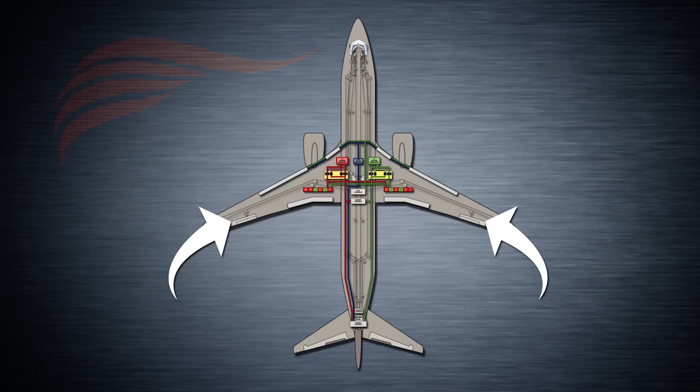The ailerons are coupled so that when one of them moves down, the other moves up. There are 3 ways of achieving roll control on the 737 NG: manually, by moving either control wheel; automatically, by autopilot input to move control wheels with actuators; or through flight spoilers. These will be discussed at a further stage during this lesson.

During manual operation, the flight crew controls the roll attitude with control wheels that are interlinked mechanically in order to provide system redundancy. Just like with the elevators, the ailerons are actuated through pairs of cables that transmit force.

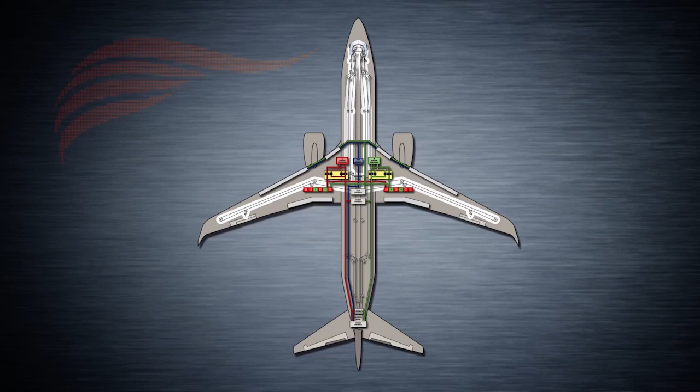Ailerons are also operated via the Aileron Power Control Unit, or PCU, that acts as an interface between the pilot's mechanical inputs and a series of hydraulic actuators that move the ailerons with wing cables. The aileron PCUs ensure that the ailerons are movable under any condition.

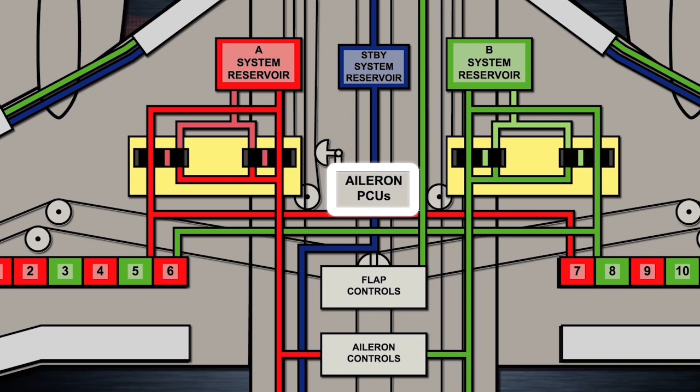Under normal operation, each hydraulic system controls a single aileron. In case of a hydraulic system failure, the working system may control both ailerons. In case of a total hydraulic failure, ailerons are still controllable mechanically. This condition is known as manual reversion.

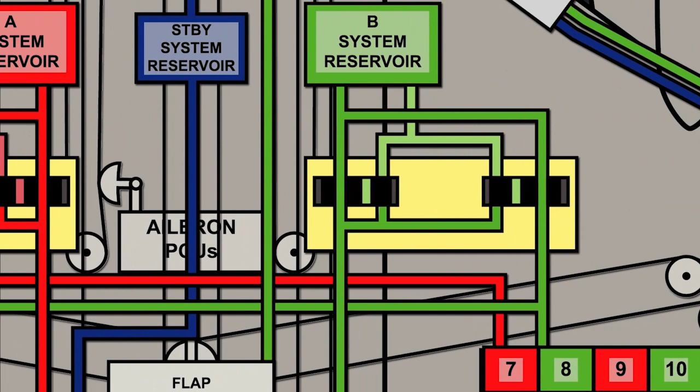The upper PCU gets hydraulic system B pressure, and the lower PCU gets hydraulic system A pressure. The PCUs also limit aileron travel to 20 degrees up and 15 degrees down.

When pilots turn the control wheels, mechanical stops in the aileron control wheel components keep the control wheel movement limited to 107.5 degrees left or right.

The aileron feel and centering move the ailerons to a neutral position when there is no input. When the control column moves, a roller is moved, causing springs to extend and provide a feel force. When the control column is released, the roller moves to a detent, and thus the system moves to a neutral position.

The captain's control wheel directly transmits force input to the aileron feel and centering unit, whereas the first officer's control wheel directly transmits force to the spoiler mixer. The spoiler mixer is further discussed in the secondary flight controls lesson.

In case there's a failure or jam in either control wheel, the aileron transfer mechanism allows for both control wheels to be able to make roll commands.

For example, if the spoiler system is jammed, aileron roll control may be achieved through the captain's control wheel. However, the first officer's control wheel and the flight spoilers would then be unusable. On the other hand, if one control wheel cannot move, the mechanism allows the other pilot to operate the other control wheel satisfactorily.

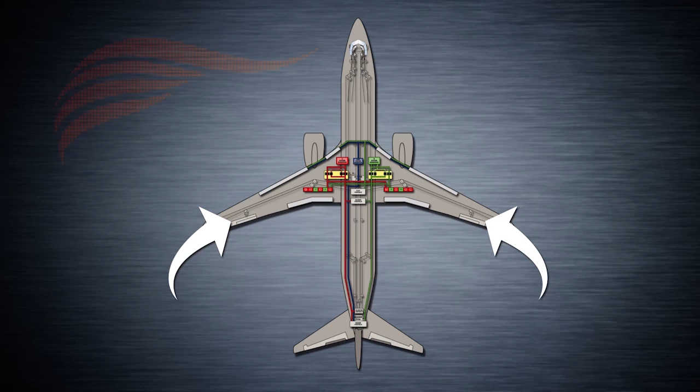We saw before that the elevators and their systems were virtually in a straight line from the control columns in the cockpit. This is not the case with ailerons, where many of the components are located away from the airplane's fuselage. The ailerons are located on the outboard trailing edges of both wings. This requires complex component linkages, which are achieved in the following way.

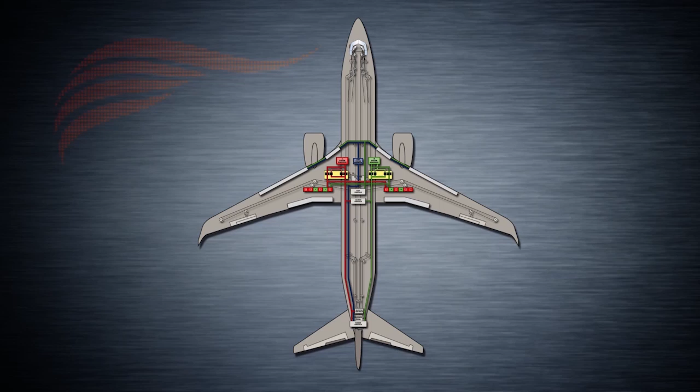The systems that run along the center line are connected to aileron body quadrants near the forward bulkhead of the main landing gear wheel well. Both body quadrants are connected to each aileron PCU. If one hydraulic system is off, the other PCU commands both quadrants. The body quadrants are connected to the wing quadrants through the wing cables. So when a wing cable moves, it moves the related wing quadrant and finally the respective aileron.

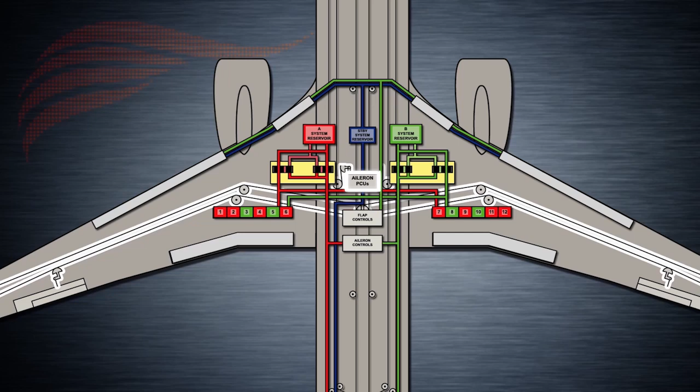Similarly to the elevators, there's an aileron tab that moves in a direction opposite to aileron movement to maintain positive balance. For example, when the control wheel is moved to the left, the left aileron rises and the left aileron tab comes down. In the opposite wing, the right aileron comes down and the right aileron tab rises. This induces a noticeably higher angle of attack in the right wing compared to the left wing, causing the right wing to go up and roll the aircraft towards the left.

The ailerons also have balance panels and weights in order to decrease the force necessary to move them during flight.

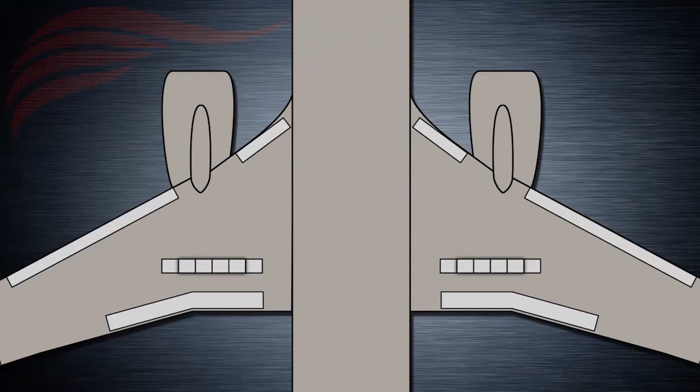Flight spoilers are used to achieve significantly higher rolling moments around the airplane's longitudinal axis. These are a series of panels on the upper surface of each wing that rise when extended, creating an enormous amount of drag. Flight spoilers are only meant to be an aid to roll control, not the primary roll control method. There are 6 spoilers on each wing, numbered 1 to 12 from left to right.

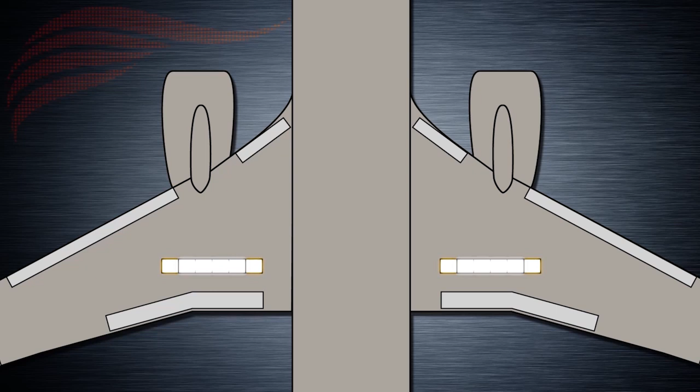The most outboard and the most inboard spoilers on each wing are ground spoilers. Only the 4 flight spoilers on each wing provide roll control. During roll, when the control wheel turns left, the flight spoilers on the left wing move up, and on the right wing, they stay faired down.

Flight spoiler panels on the 737NG have numerous functions, such as aiding ailerons in achieving roll control, aileron trim, speed brake operation during flight, and speed brake operation on ground during landing.

Similarly to ailerons, the flight crew uses the control wheels to control roll with spoilers. The control wheels give mechanical input to the aileron power control units, PCUs, through the aileron feel and centering unit. From here, the PCUs supply mechanical input to the flight spoiler actuators that use hydraulic power to move the flight spoilers. The control wheels must be displaced more than 10 degrees left or right to actuate the respective set of flight spoilers. System redundancy is provided in the following manner.

Each hydraulic system powers a specific set of flight spoilers in such a way that there's no asymmetrical deployment when there is a hydraulic system failure. One-sided deployment of spoilers is also avoided with this redundancy.

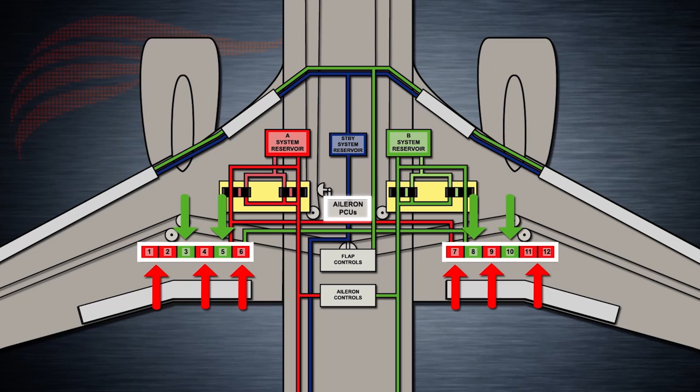Although most of the aileron operation seems difficult to understand and may need several reviews before it sinks in, keep in mind that most of what you've learned here will be transparent to you as the pilot flying. Having an understanding of the background workings of these systems may give you a greater appreciation for what goes on behind the scenes and what happens when things go awry.

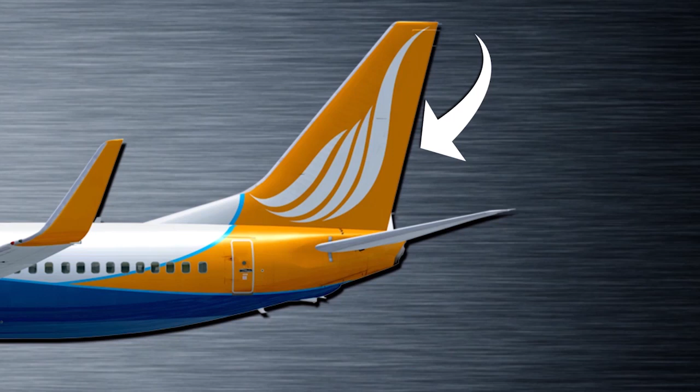The rudder is a movable surface attached to the rear spar of the vertical stabilizer that provides yaw control of the aircraft around its vertical axis. The rudder may be operated in any of three ways: manually with the rudder pedals, manually with the rudder trim, or through the yaw damper. The yaw damper will be discussed in the following section.

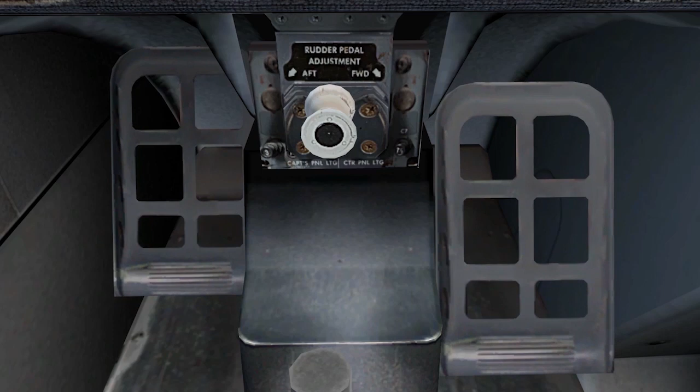During manual operation, the pilot presses the pedals to achieve movement in the respective direction. For example, when the right rudder pedal is pressed, the rudder moves to the right of its neutral position, creating a rightward turning moment and achieving yaw to the right. The same logic applies when the left rudder pedals are pressed.

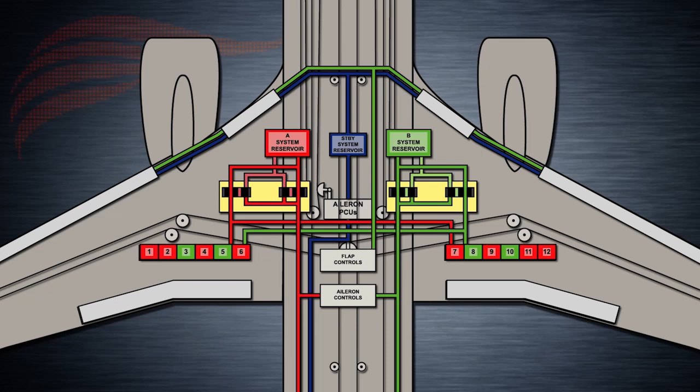Similarly to the rest of the flight control surfaces we've covered, rudder pedal movement inputs are linked to control valves in the rudder power control unit, PCU, via cables and linkages that also pass through the rudder feel and centering unit. In the case of rudder control, the pilot inputs are also linked to a standby rudder PCU that provides backup and system redundancy in the event of main rudder PCU malfunctions.

There's no manual reversion available for rudder control, which means that if theoretically both normal hydraulic systems and the standby hydraulic system were to fail, rudder control would not be achievable. The probability of this happening is negligible.

We mentioned earlier that elevators and ailerons had a pair of PCUs to control them. During normal operation, only one main PCU powers the rudder. The original 737 was designed using one dual valve with input from both hydraulic systems. This was partly responsible for a series of accidents associated with 737 rudder problems.

In 2003, the Rudder System Enhancement Program, RSEP, was introduced, where the original dual valve that received input from both hydraulic systems A and B was replaced by one set of components and actuators for hydraulic system A, and an independent set of components and actuators for hydraulic system B. In this lesson, we'll discuss the rudder system schematic with RSEP installed.